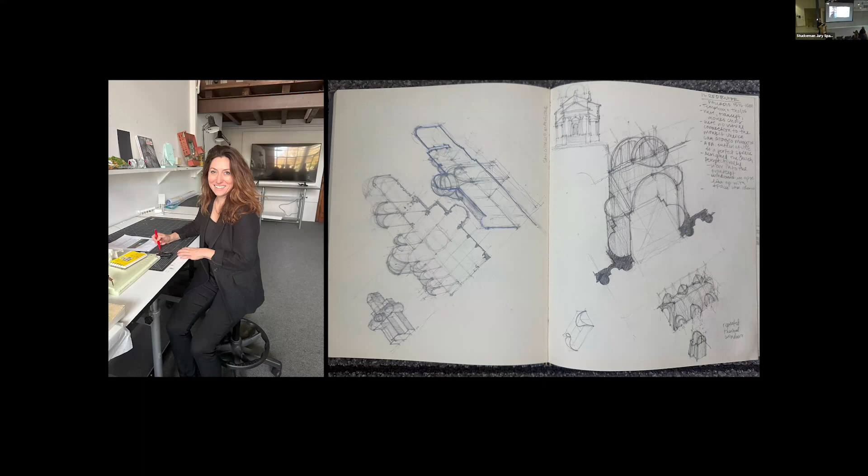And our practice, and it's influenced how we work. That's me—Jamie hasn't seen this photo—but I was back at my studio desk for a board meeting last November, so that's where we were in Florence, and some of the sketches. In school, traveling, being immersed in another culture had a significant impact on my education.

After I graduated from Syracuse, I worked for Will Bruder in Phoenix, who now is practicing in Portland. But Will has had a significant influence—he's been a great mentor, super passionate about architecture. He still comes to our reviews.

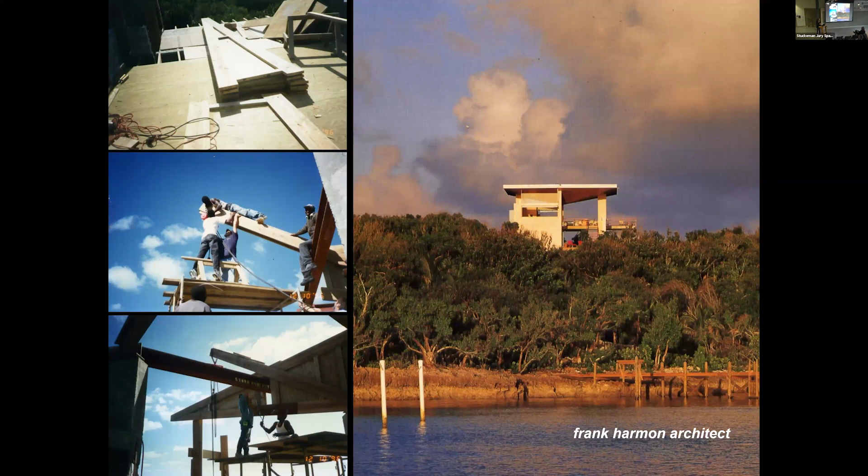We travel and see architecture, and just really understand—being on site, understanding materials, and putting them together in inventive ways. Vinny worked for an architect named Frank Harmon, who's also based in Raleigh, North Carolina, for 10 years. He allowed him to fall into these opportunities of making projects happen by building components that would normally be bid out.

This project is in the Bahamas, and the contractor quit, and Vinny flew down and did more than CA. He worked directly with the framers there, and they looked at him like, you have to know what's going on—even though usually, as the architect, you're not telling the contractors what to do.

I don't know—sorry, guys. Is that better? Good now, okay.

And so he had to really figure out how to make this upside-down inverted truss before he spent a lot of time in the Bahamas.

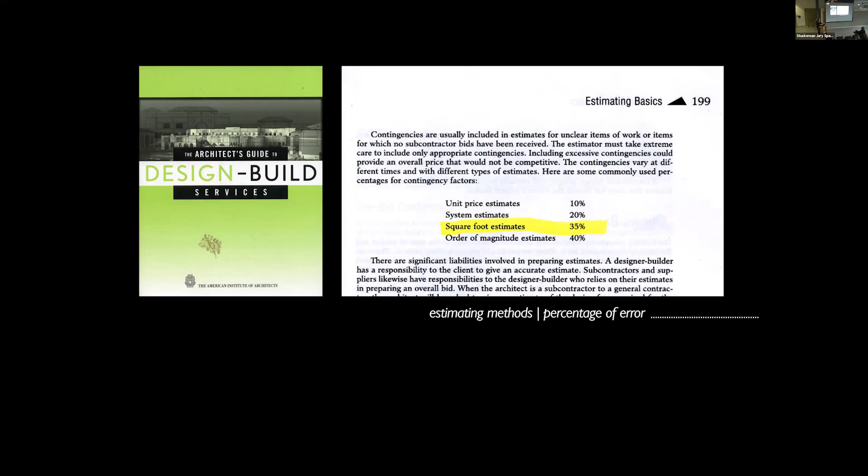So he went to an AIA conference and got this book about design-build. This was kind of a significant moment—you're always basing your cost per square foot, your project's cost, on cost per square foot, and really that's often 35% off. So we're responsible for being the architect and telling you how much it's supposed to cost in a relative way off the drawings, and it's really not that accurate. Unit price estimates are the way to be most accurate, so you need to be connected to a contractor—that's a line item budget versus an overall cost per square foot. So that was another influence.

Brunelleschi was really the last master builder. When Alberti came into the picture, he was passionate about the architect and builder being separate, whereas Brunelleschi won the commission for the Duomo because he figured out not only the design of the building but also how it would be constructed, including the formwork. This is also true of practices like Frank Lloyd Wright, where architects in the office would go to the site and really experience construction as it happened.

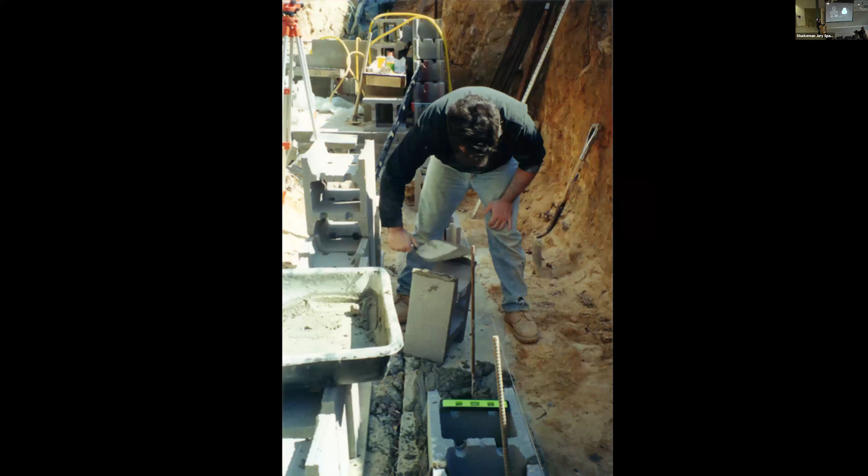We really value taking architects out to the site, and taking models and design to the site. This is our framer, Fernando, who framed many of our projects. We brought him the framing model, and that was enough for him to stretch the strings and figure out the project. So like in many practices, we go from an idea or a diagram, then jump to a model, which often gets messy because we're changing it.

From that, we could do probably a few less drawings because we're the ones building it, and we won't change order ourselves. Really we would build a mock-up, go directly to the roofer and say, let's confirm the conditions of the siding and all the window details. The last image is a standard standing seam metal roof, that roofing material with three different widths just put together in a different way.

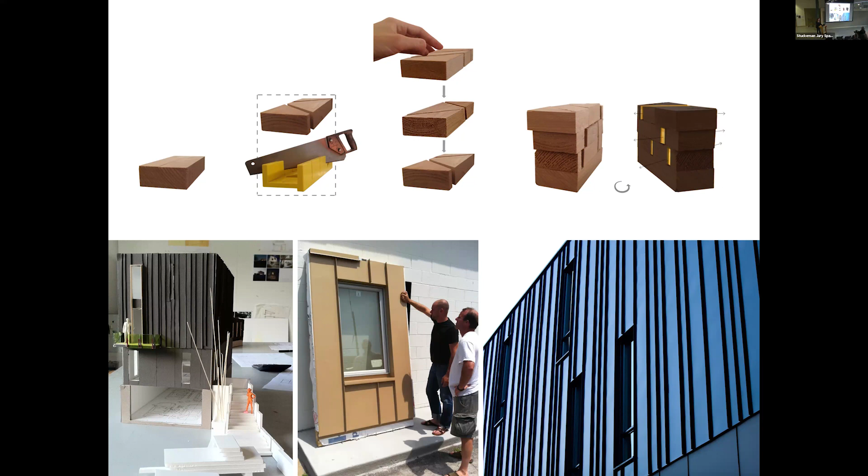That's Michael's house. He's a musician, and it's a 4-story house in the middle of Pittsboro, North Carolina.

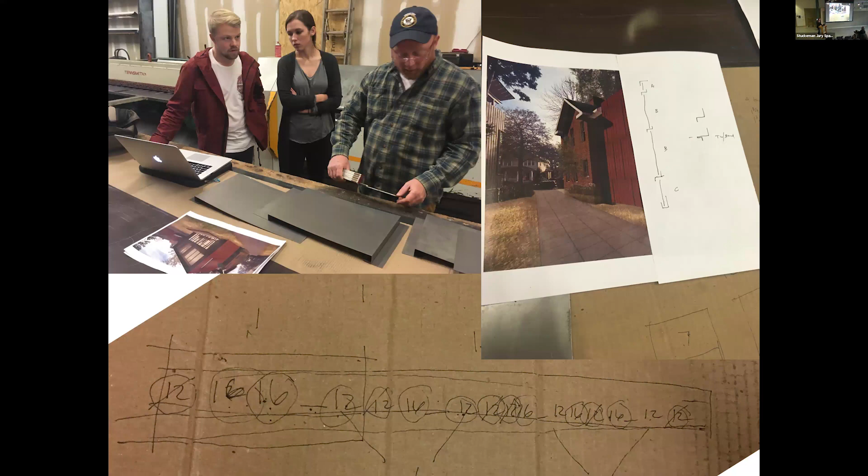This is Ron, our roofer. Nick and Morgan worked in our office a few summers ago. We always have students spend time in the summer in our office, and what we like to do is really get them connected and be on the site talking to those making. I think we learned so much from our subcontractors—insights you just can't get from doing the drawing.

So we were trying—he's done a lot of our projects. This is Cor-Ten, and they worked directly with him to come up with this kind of custom siding. It's not actually such an expensive material, but then you think about how you could put it together in a different way with these reveals and the lengths and widths of the material. Ron also helped us with this house, also Cor-Ten, similar material, different project and client. He's just a small operation, a couple people in his office, a local subcontractor who's done some really creative things.

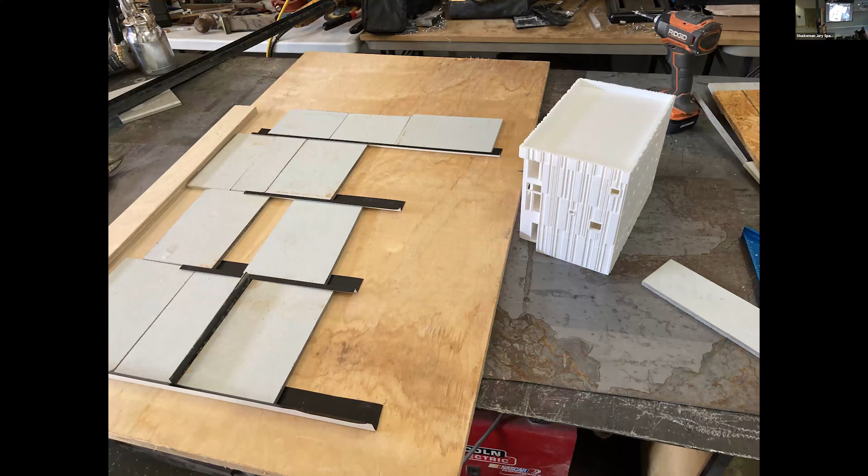This is in our shop. I'll show you a series here. We were building a house for clients in the middle of COVID, and they had a bank loan, which means there was no more money than what they had.

So we had 3D printed this model of a custom metal siding. We realized that it would be too expensive for what we had in the budget—there were some things that got more expensive during COVID.

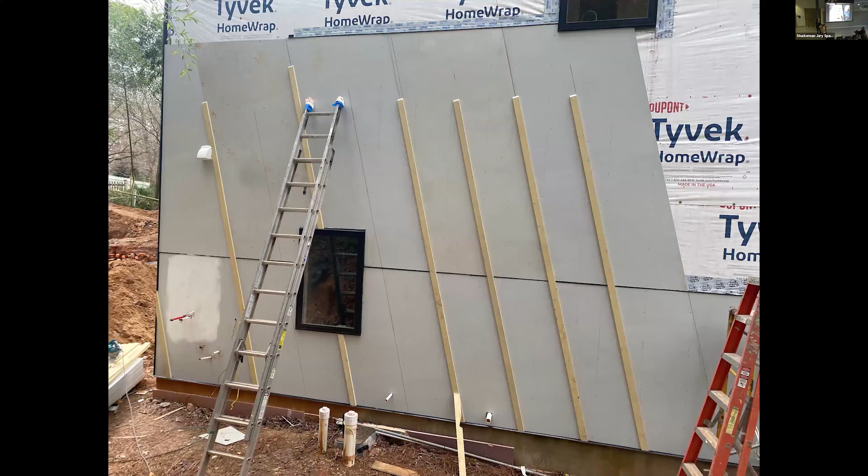So we decided to use a cement board siding and look at it in a different way. We took the model and put tape on it and thought about it in a really messy way, but figured out what we could do. Luckily our clients were really engaged in this process and open to different ideas. So we thought about a traditional board and batten with fiber cement board siding, and how we could reinterpret that in a different way.

So that's Paul and Judy, our clients, and they love color. She's a chef, they own a restaurant, and they're musicians, and they just wanted something really fun. And so that's what we did.

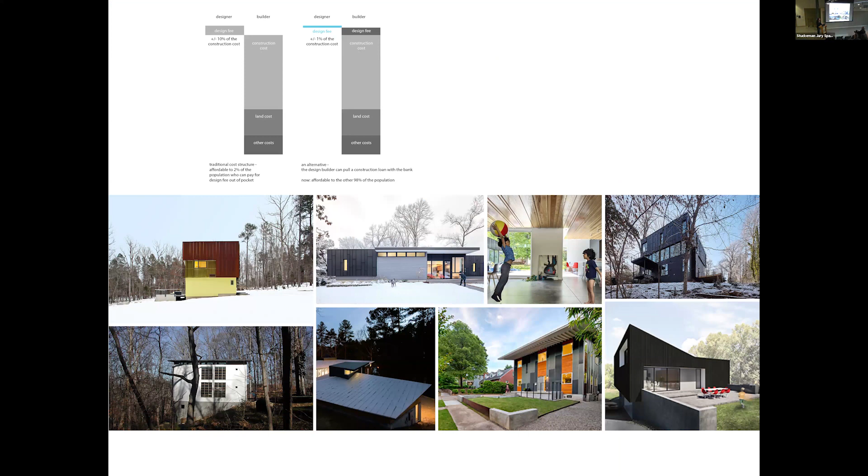We had to make those choices and be inventive with them, given the budget and time of construction. So in our practice, many of our projects have been what we call bank loan architecture.

Our clients are really great, they're passionate about doing something different and not just buying a standard house, but they don't necessarily have the resources to put a down payment on a piece of property and then pay the architect's fees. So what we could do as the general contractors is have them pay a small percentage of the design fee, and then roll the rest of the design fees into the construction loan, because we were the ones getting the construction loan. We really felt like that was making architecture more accessible to a larger group in our place, and it allowed us to expand our reach and have more projects because we could do both architecture and construction.

So this is an example of one of those houses, this is for John and Stacy. John Cravel said, as time goes forward, we're catching up to the past in a way. We saw these agricultural structures in the landscape of Hillsborough that were rusted and had a more negative connotation, like they were falling apart. And we saw that as something really beautiful - how could we reinterpret that?

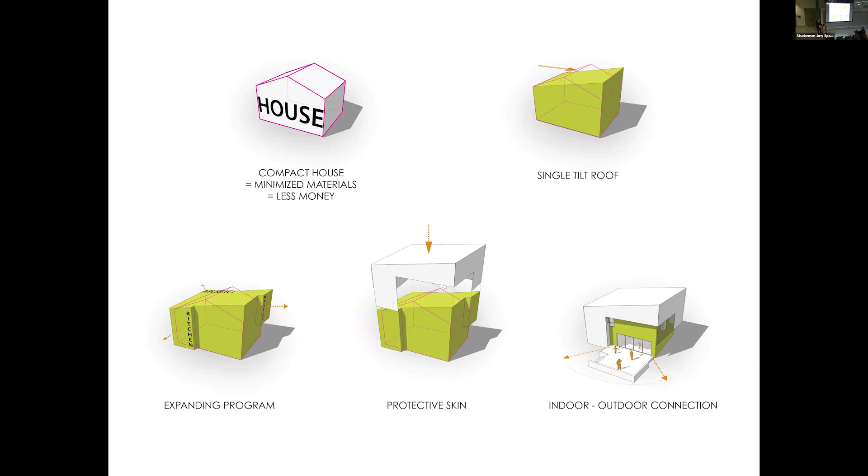We also knew that with a $300,000 budget, we needed to think like a traditional spec home builder. So this image of a house, and how we could make minor adjustments that wouldn't add a lot of cost - we could maybe tilt the roof in a single tilt, we could expand the program on the inside with small cantilevers, not in steel but in wood, like a bay window or fireplace, and just really think about how we could use the material to create a different form.

So we worked directly with the concrete subcontractor. If we had given them the plan - there are no right angles - they probably would have charged us twice as much because it's different and they'd have to think about it differently. But we just worked with them on site and said, it's still the same formwork, the same material, the same amount of time, there's just a few different angles. That was a way of maintaining costs, working directly with them.

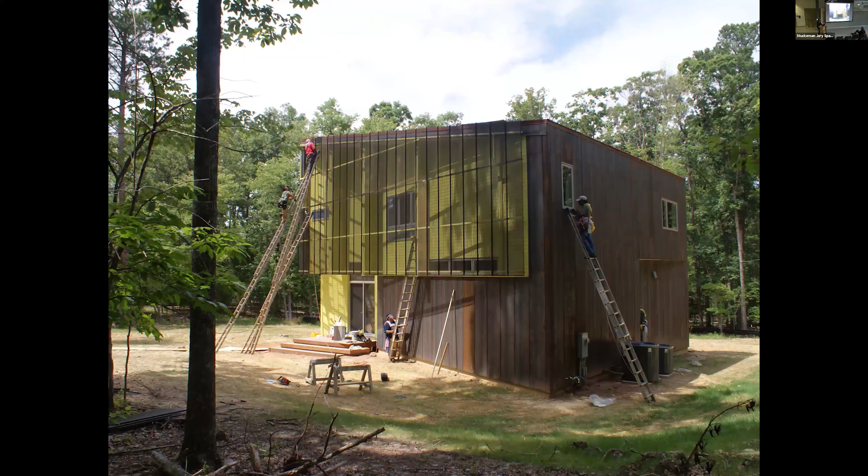And then from there we extruded the framing, and we had Ron with us again. We used Corten with flat panel and then perforated Corten - these small fins on the front where we could cantilever out and create depth and shadow, a screen that made it different just using more cost-effective material.

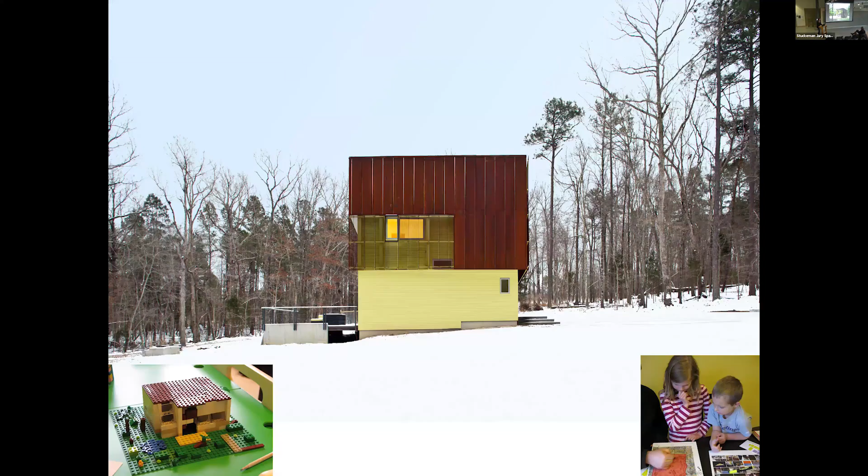That's Ian and Madison, their Lego model when we first started the project. But we see the whole family as our client. And that's one of the infrequent days we get snow in our area.

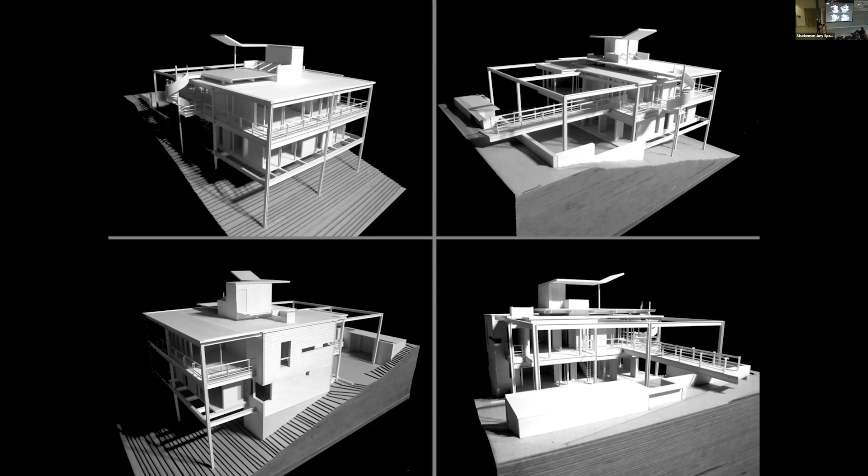The clients at first said, there's no way I'm buying that house. But then they went and visited all of the case study houses in California, and they came back and said, you know what, let's do this project. So now it's a house for John and Molly, and they collect art. This wing on the roof probably would have been cut if another contractor had built it, but at the time our firm took on that piece, and it's really a great place where they use it every day to have meals outside.

Another way of working is we presented this model to our clients, and they really got it. We had shown them more realistic renderings of different iterations, and they didn't like those, but for some reason they really got this one, and they said that's the project.

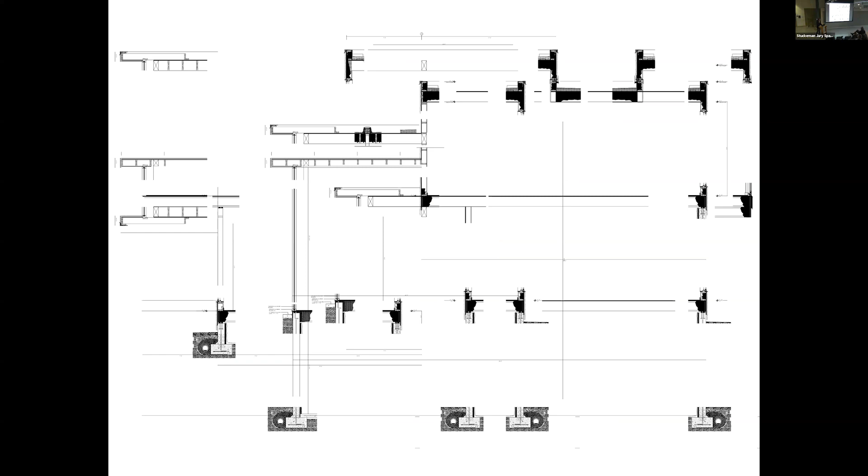But from that, early on, we like to jump into detailed drawings to understand how we're going to make all of these white frames and maintain the proportions. So working backwards, very early on we go into how will this be made, how will we construct this, confirming all of the details before, and then we use that to influence the design.

And so building models, this is the project. It's a house in Raleigh. We were just the architect for this project, and another contractor built it, but we tried to maintain the diagrammatic idea of that first model through understanding how something is made and constructed.

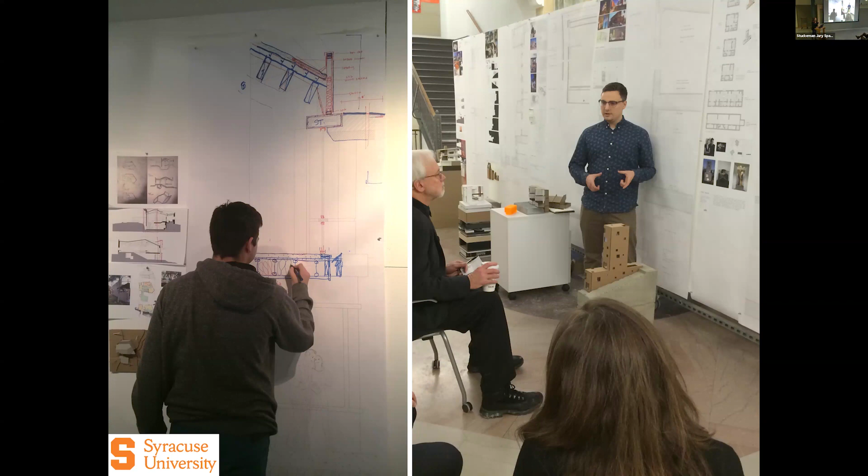As Jamie said, we teach. This is from Syracuse, and we like to do these big drawings and models and different studies, kind of how we work in our own practice. And this is from the studio at NC State.

Right before COVID, we brought scaffolding into the studio. It was awesome, we were making all sorts of panels and mock-ups, and then it went to Zoom. But this is a digital fabrication studio, so exploring how things are made.

We torture our children - that's Elizabeth and Marissa with architecture. We make them drive around and see a lot of buildings. I think that's really important as an architect for all of you.

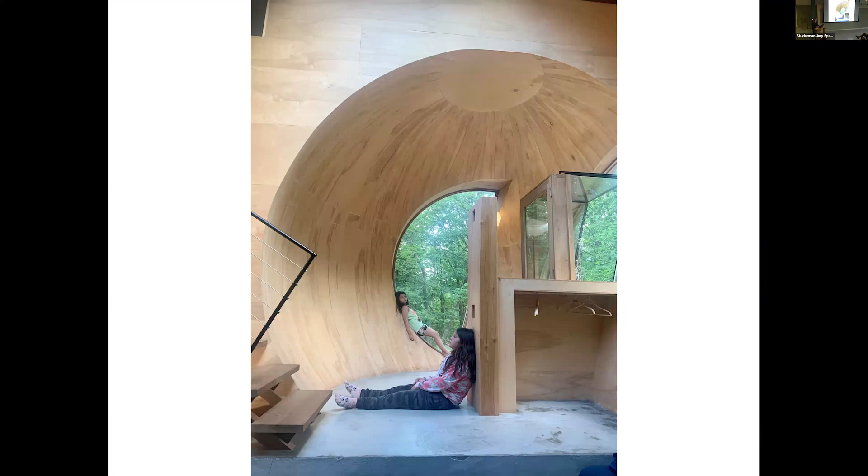You'll see their masks during COVID - we drove to Kentucky, and just really being able to understand materials and light and experiencing architecture is so important to us. This is Steven Holl's cabin, you can rent it on Airbnb. It's pretty awesome, our kids loved it.

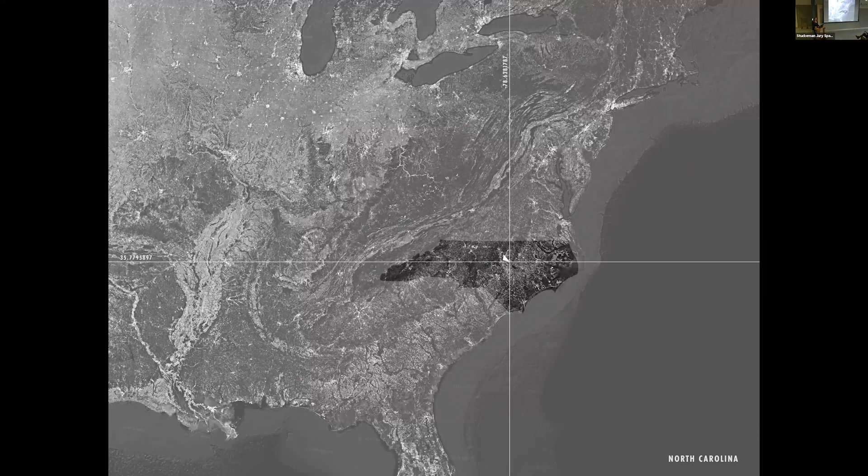So we are based in Raleigh, North Carolina, and we're in this really great area called the Triangle - Raleigh, Durham, Chapel Hill. A lot of universities, a lot of research.

It's not a huge population - it's growing quickly, but between the three it's a little over 1 million, and that number has probably even changed by now. But you're probably familiar with many of the universities, a lot of great art and culture. Many of you know us for this, especially this time of year, and so that's where we are.

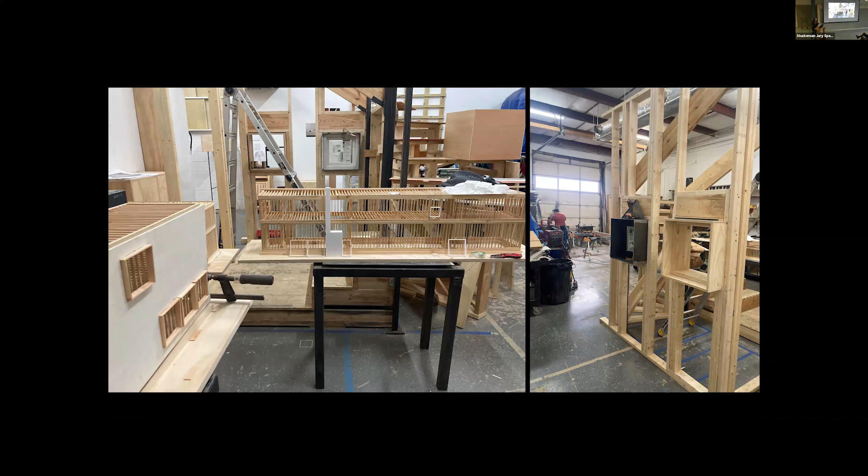So all of these realms have an influence on how we practice. And this was from the other day - we're building this big framing model of a house that we've been working on for a while, a multi-generational house.

The other image is confirming the window details and how to address having a good thermal break. So we're just doing some mock-ups, but we'll randomly do things like that throughout the office.

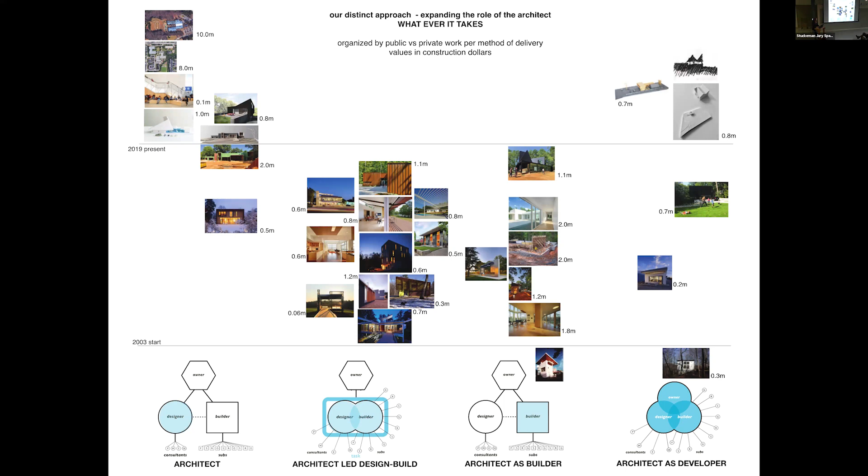And then we've developed a few of our own projects. So you can see a lot of houses between 2003 and 2019, and we were trying to make the number of images above 2019 grow, and that's really why we transitioned the practice and renamed it, because we wanted to start doing more public work.

So again, these are the different models of practice. We're kind of messy - we don't just think there's one approach. For us in our place, we've had to expand and do different things to survive.

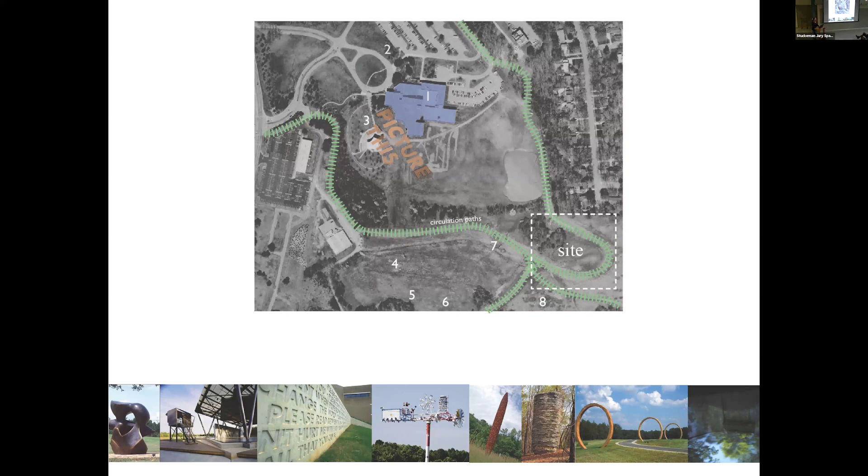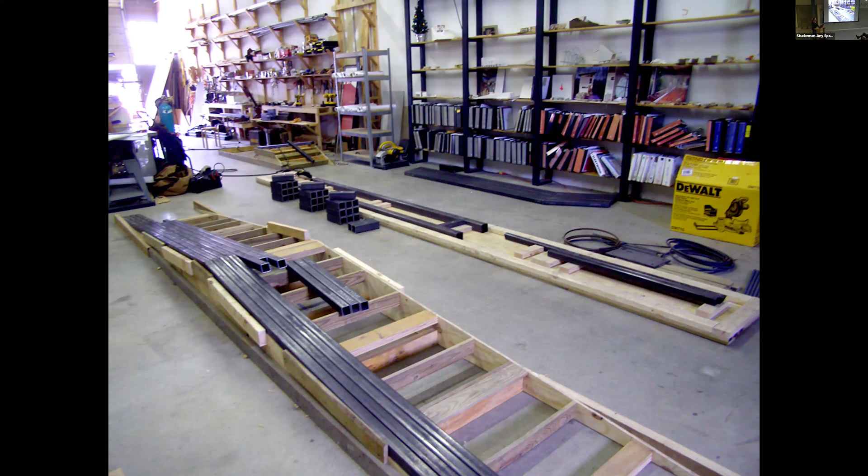This is another early project of the office, at the North Carolina Museum of Art. This one is design-build, architect and contractor together. It was an outdoor classroom in the art park—we have a great art museum locally, but also a great outdoor sculpture park. This was built in our old shop, where we made the components like Tinker Toys, then brought them out and assembled them.

This is a pavilion for an outdoor classroom, but it has taken on a life of its own—people have gotten married here, they do yoga here, there are class trips. I think that's really an amazing thing, that the first intended use is not always the use of the project, and that's what has really inspired us.

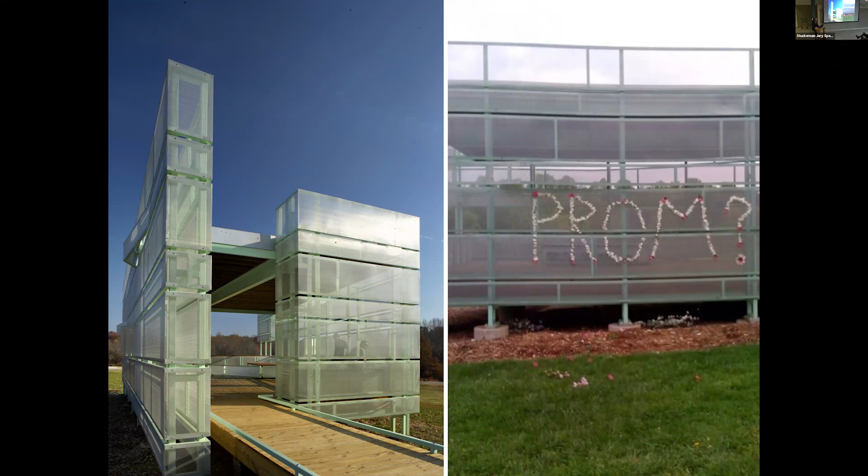That's our daughter's class, many years ago, on a field trip. Someone in our office one summer brought in this picture—her friend asked, 'that's not Vinny asking me to prom,' someone from our local high school. I think this is a really pivotal moment where you see how the community responds to your architecture and does things you wouldn't think about, like putting flowers in the perforated metal.

That's really the foundation for what inspired us to continue doing more public work. So this is Larry and Angie from Brooks Scarpa. They had a client—one of their first projects in Los Angeles—who bought some land in Hillsborough and decided to build a house. We were the local architect and contractor, and it was great working with them.

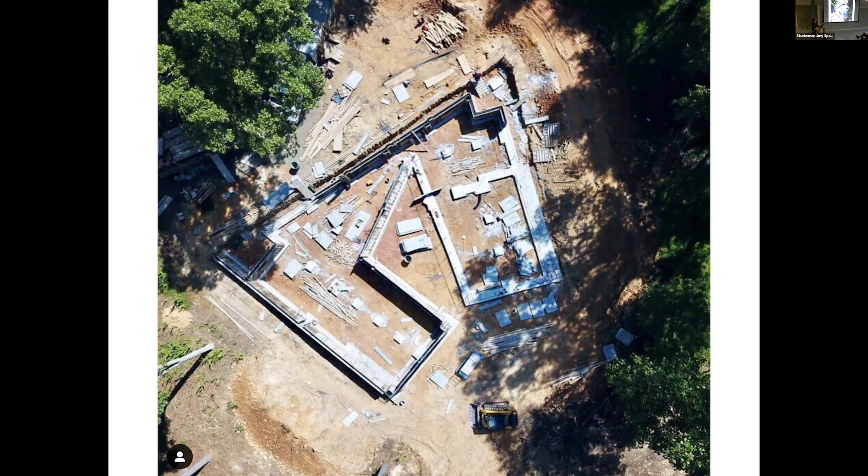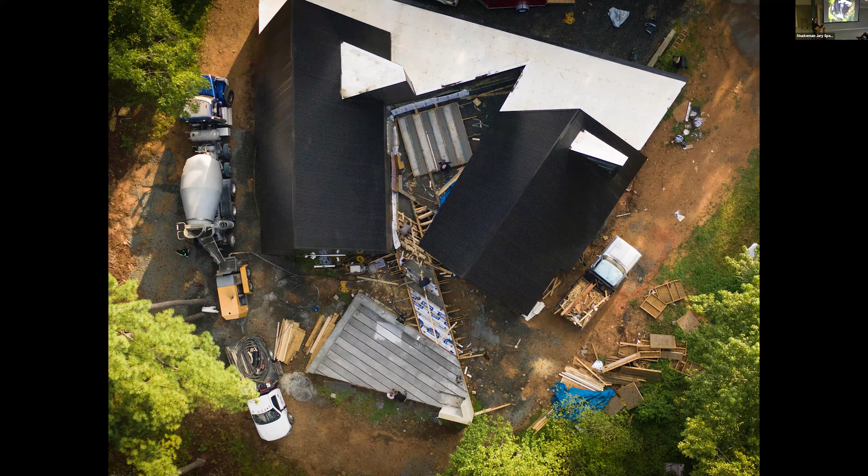It's kind of like having an opportunity to work in someone's studio and collaborate. Again we see concrete, no right angles, working with the same subcontractors we always do—but this is a really different house. I think we really believed in helping Larry and Angie realize their vision, and in that case we understood why they would make things differently or want to change things. We're all there trying to realize the best design possible.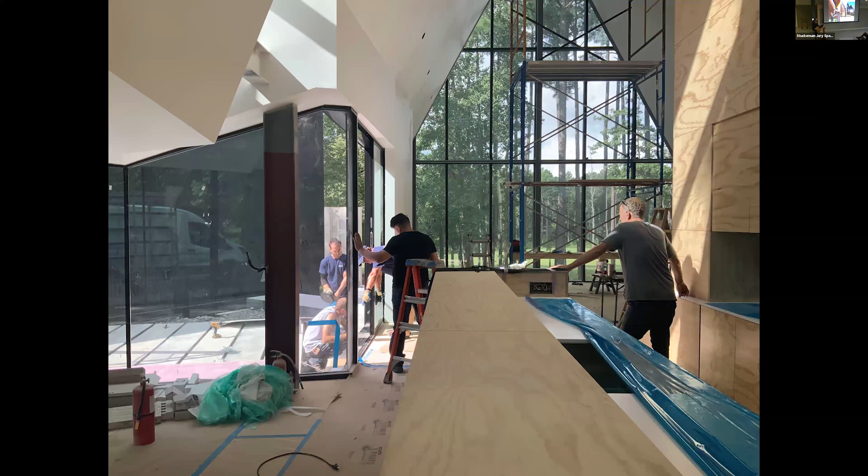So this is how we would communicate—Larry's on the West Coast, and that's our client, Steve. Do you want your spring point to be at B or A? We would confirm things and stretch strings, really just wanting to get it exactly how they wanted. It's this one-story house with 30-foot tall peaks on a large parcel in Hillsborough. They're still in the process of getting final photographs, but that was a great project to be part of.

I think why we show this is that most of our business doesn't come from development, but as an architect it helps to understand the systems at play, because there are a lot of people using Zillow who aren't necessarily interested in architecture, or that's not their main goal. But if you understand what the systems are and how to use them, that's how you begin to have an influence.

So we bought a piece of property—that's what our clients bought it from us for—in a neighborhood where we have about 5 other projects. There's really steep topography, so we understood it was a leftover lot. We did a quick sketch, put it on Zillow, and got a client. They bought the land and hired us for design and construction. I think that was kind of an interesting process.

Then this is really the main transition—it's taken about 7 years to really move into more public work. There were a lot of RFQs we sent out, but they said no. I say that because once you start in a particular project type, it's sometimes hard to really change; you have to keep being passionate about it and trying to change the perception. Often that means starting with really small projects. After telling us no, 2 years later, we submitted again.

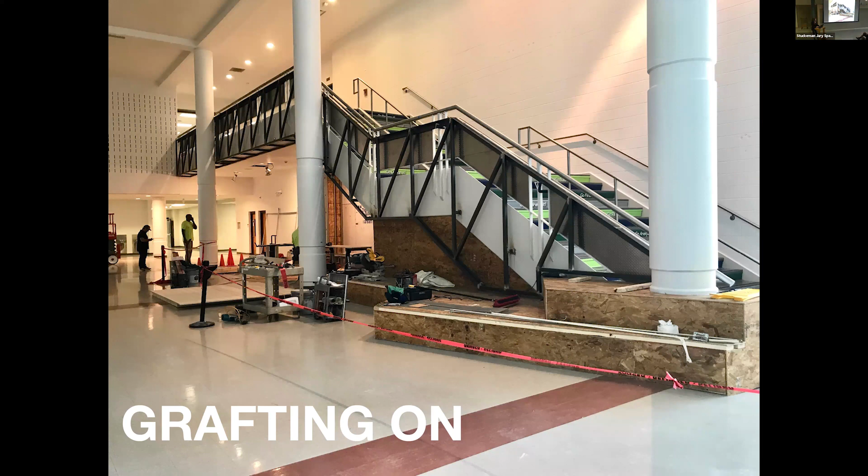So this was the existing space. I noticed that students don't have anywhere to sit. It's pretty dark. It's a large high school in Raleigh, Southeast Raleigh. What we realized is that with our budget, thinking as if we were going to build it, we would have to use what's there. So painting the space white was probably one of the bigger impacts and worked pretty well. But then this stair was overstructured, so we figured we could just graft on with an off-the-shelf material, steel, and use that. We wouldn't have to add any more structure, and we created pretty cost-effective plywood benches.

And then we turned the stair into a light fixture because that's what the space was really lacking.

There were a lot of trophy cases, and the principal at the time, the school's exceptional at sports, but she said, I'm proud of our history of athletic achievement, but I want the students to be on display, and I want to create a space that feels collegiate and encourages them to go on to the next step after high school. So within the depth of the trophy cases, we didn't add any new structure. We knew we couldn't. We just made a place to sit.

And so those are their writing surface tables. Now they have art, and it's really nice to be in a space that's larger, but you can have a smaller conversation, so you can be a part of the bigger community but still private.

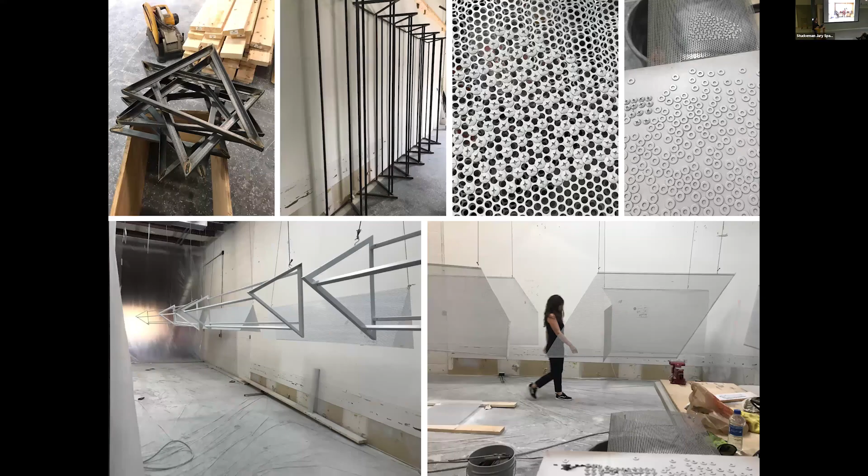The light fixtures in the space didn't come out so well the first time the contractor made them, so we told him we would take these on. This is our shop before we had renovated, and we fabricated those for him.

But really with $150,000, we worked to transform this space and gave 1,600 students a place to sit. And this is used for magnet fairs and a lot of other events.

I think that's our girls. What's really nice about this is when you do work in your community, they came back to the school for a basketball camp. They play a lot of basketball, but with a small $150,000 project, it received national recognition. I think it just really shows that with a small budget and small scale, you can still have a big impact.

So this is with the same client, and because we worked really hard on that first project, they gave us a study for a $10 million project.

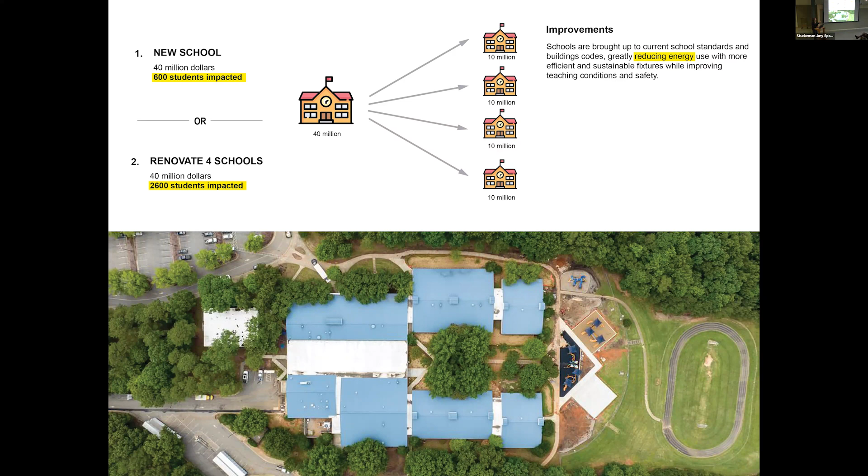So they gave us a study, and in our county school system, they were trying to figure out how to save existing buildings instead of tearing them down. We have $40 million to build a new school; in our community a new school costs around $40 to $50 million. So we said that if you distribute those funds between 4 schools, you can have an impact on 4 times as many students and renovate schools versus tearing down and building just one new one. That was kind of the principle of the project, testing out this new idea.

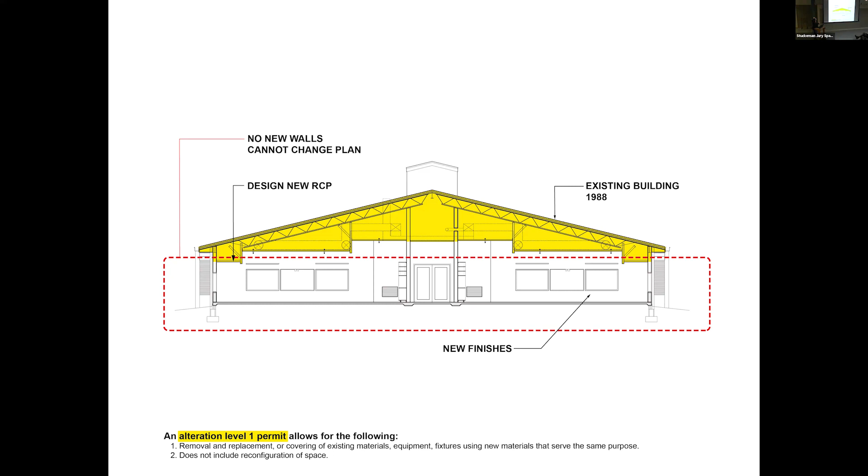Throughout the building, not in this section, the hallways are sloped to a non-ADA slope, which we couldn't change. So we were limited to what's called an alteration level 1 permit, which meant we couldn't change any of the interior walls. We could just basically do 1-for-1 replacement of fixtures and finishes, and then our real design opportunity was the reflected ceiling plan.

The original architect, I think, was very thoughtful about natural light, so there are these moments of clerestory lighting throughout the building, but we really wanted to unify that as one element.

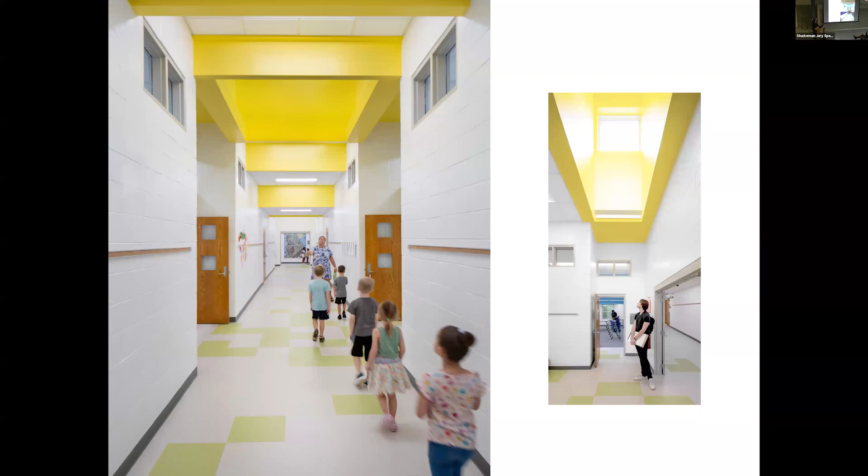We introduced one color and cleaned up all of the spaces, renovating the classrooms while really acknowledging the natural light in the space. This is the existing classroom, and we introduced color in a different way, opening it up and enhancing the natural light.

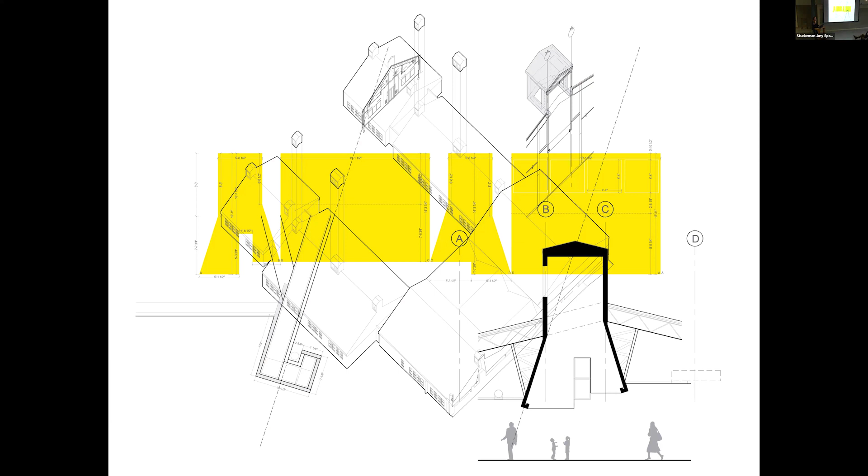The county school system has their standard materials, but we looked at how we could use them, and how the project would be made. Going back and doing diagrams and drawings like this is really important to us, but really all we had were metal studs and sheetrock to make a difference. So that was our palette.

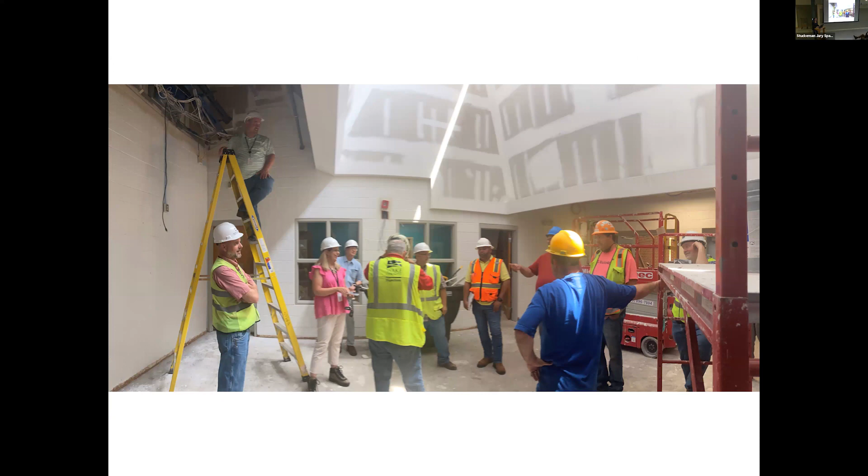I moved to North Carolina 17 years ago to work for a nonprofit called Design Corps, a 1-year AmeriCorps fellowship. We focused on working with the farm worker population, one of the largest in the country, here in North Carolina.

We used that money to hold a series of participatory workshops with farm workers, at a farm in Brevard. They were pretty progressive, probably better to their farm workers than most, and made sure they had a good place to live. That was our client, really, in the western part of our state, a farm that grows mostly herbs.

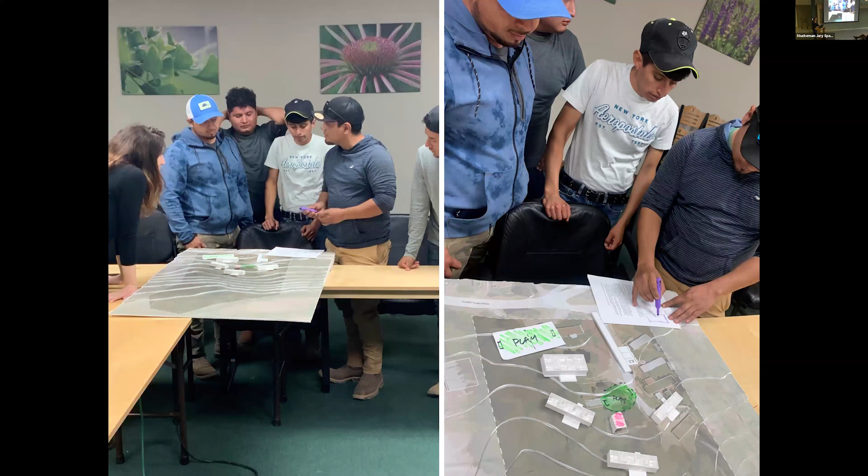We held a series of workshops. The owners of the company left, so it was just us, the farm workers, and the nonprofit, who spoke Spanish and helped with translation. We presented our ideas. Interestingly, most of them live in mobile homes now, 2 and 3 bedrooms, which are kind of falling apart, as normally happens.

We showed them a plan for a 2-bedroom unit with a bathroom, nice and clean, and we were really excited about it. But you can see in these drawings, they really didn't like it. It wasn't a good idea to them, because sharing a room with two or more people meant they never had their own personal space.

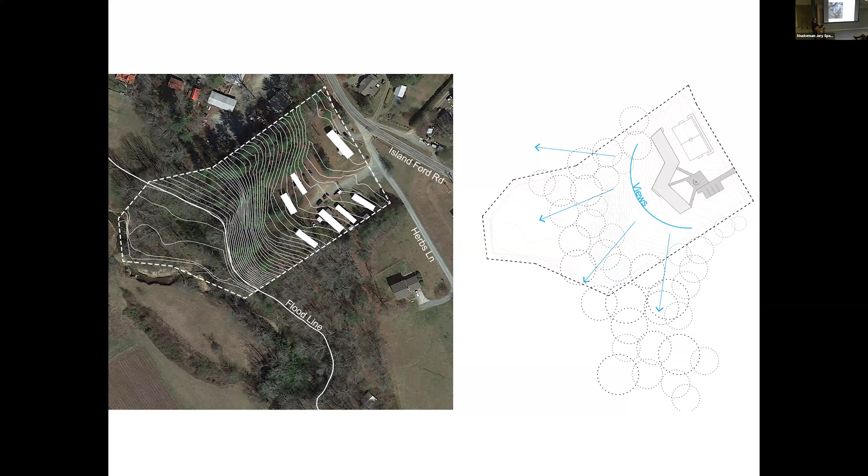What really resonated was going back to individual units, almost like an individual room, with a window and a door you could close for privacy. Even if it was half or a third the size of their current bedroom, that would be much better.

So we took that feedback and decided, for 30 workers, how can we rethink this? Even though we didn't want to hear that they didn't like our design, it was actually the best feedback. We really believe in having those conversations with our clients and engaging the end user.

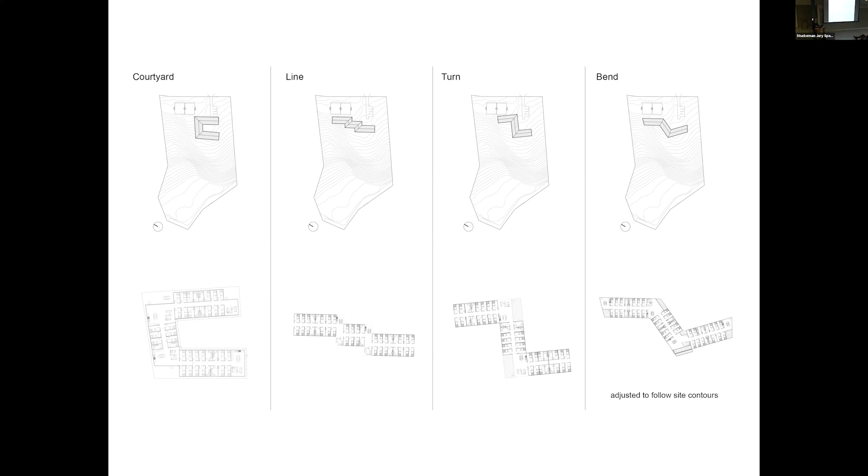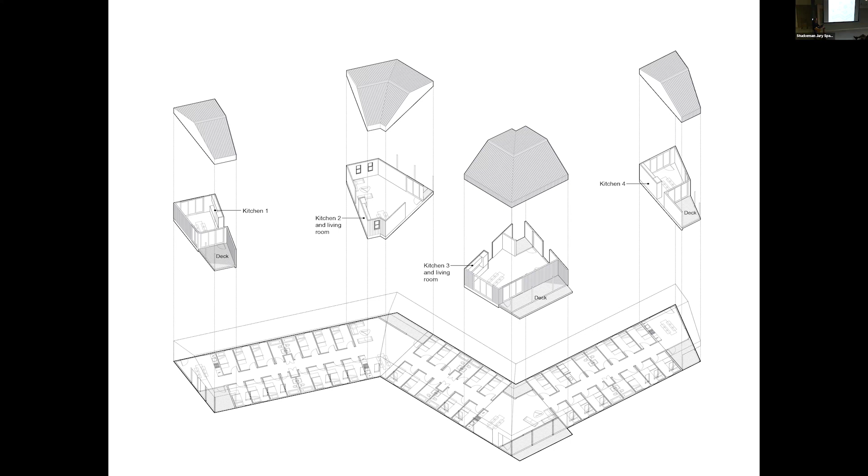And because of the grant, we were able to have those—the farm worker community doesn't always have access to an architect directly. So we're trying to think of ways of coming up with a shared public space and individual units, providing more bathrooms than required by standards, and having areas where you could be part of a larger group or retreat to your own space.

And then we've been processing how we can make it in a factory and deliver it to the site. That's been interesting, because a lot of the manufactured housing companies can only go a certain distance, or they don't want to change their design because it's already been permitted and meets code. So it's been an interesting series of discussions.

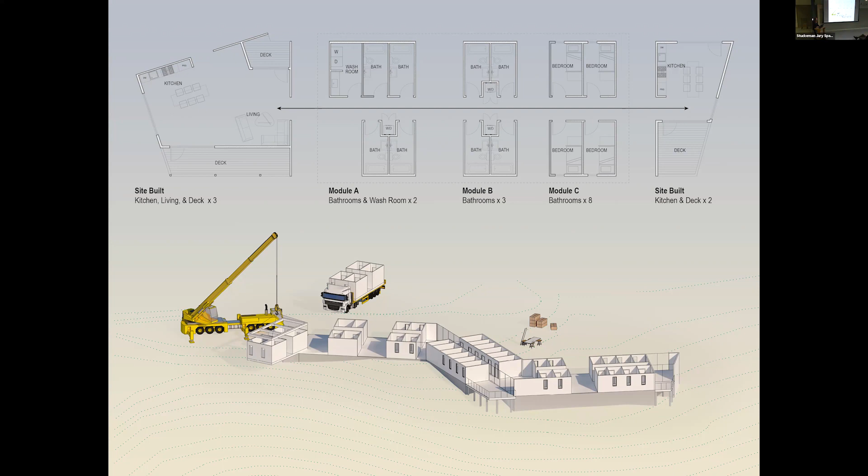The nonprofit secured additional funding from a local foundation that is covering the soft costs of the project. So we're kind of trying to figure out how to make this work, and it has to be focused on farms in Western North Carolina. The original farm decided not to do this project.

I think that was Melinda, who works at the nonprofit. She said she's been working on farm worker housing for 30 years, and she said, you asked me at the beginning why this doesn't happen, and here we are at the end, and you're not moving forward, and it's because they prioritize other things on the farm besides housing.

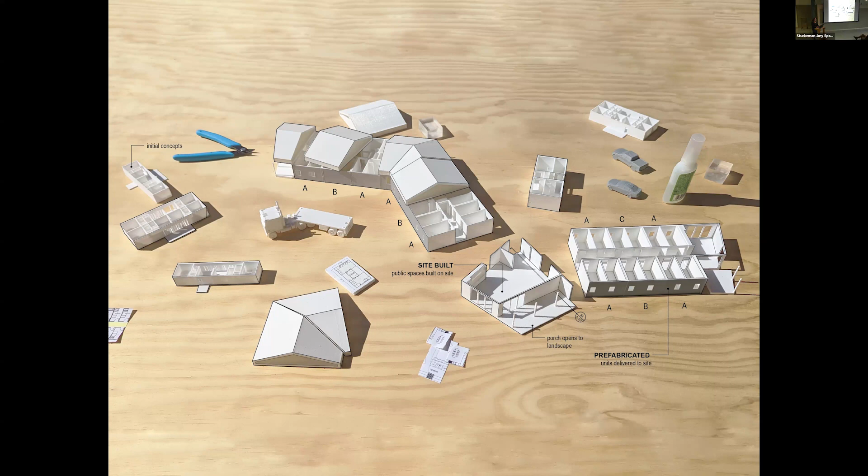But we're developing a unit for 6 workers, which will probably be more tailored to a lot of the farms in the area. So we'll take what we've learned from this, and we're working on adapting that unit—using more durable materials on the outside, but really maintaining that connection to the site.

But for us, this was a really exciting project, because this is the first freestanding pre-K center—public pre-K. Usually schools have 2 classrooms within elementary schools, but this was an independent center, on an occupied campus of an elementary school.

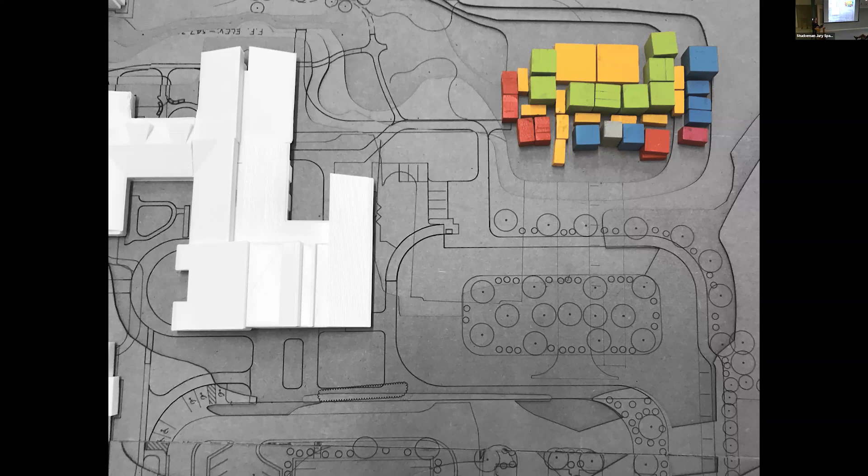So we had to think about how to get a new building on this campus. And I think beyond the architecture, this building addresses food security, emotional support, speech therapy, academic support. There's a fair amount of Title I students in this building, and it's all public education.

And so I think architecture can address a lot more than just the building. But this is early on in the process—we met with all of the pre-K teachers and staff, and they had some of the best insights.

This was very early on, because this was a project type that the county school system had not done, we had not done, they had not done, and so we were all really learning together.

In addition, we removed some contaminated buildings, so we didn't add new impervious surface, which helped us from a permitting standpoint. But what was great is that we added this new pre-K building and then gave a walking track, a constructed wetland—which we needed for construction—and more playgrounds to the existing school.

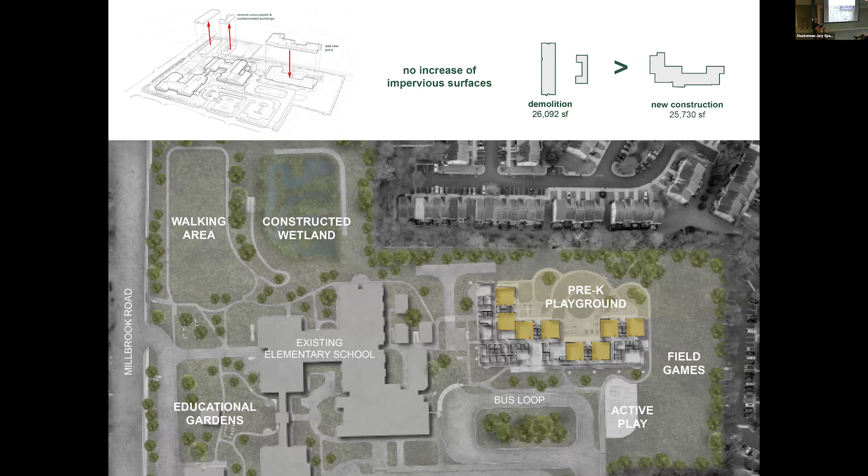So with the building, we enhanced the overall campus, and it's an environmental connections magnet school, so they can use the wetland for learning opportunities. I think this will play.

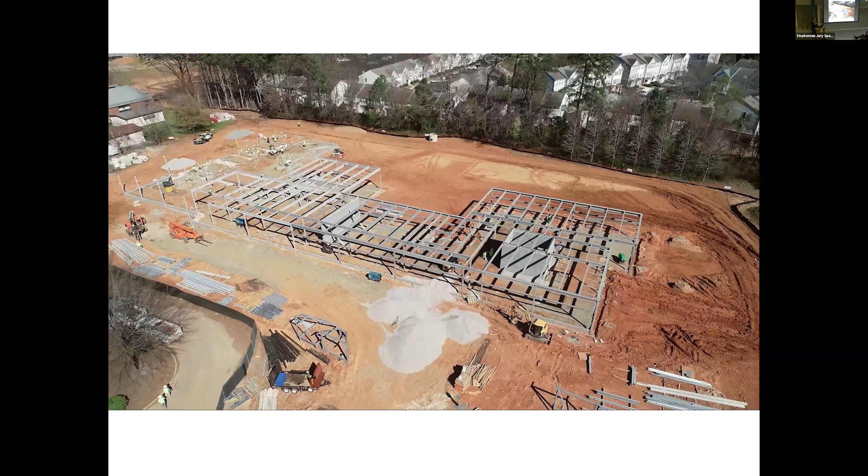The building's built, but I just show this because for us, this was our largest freestanding building project as a practice, and it's going kind of slow. But trying to figure out how to have construction happen on an occupied campus while the other students are still there, how to phase it with the wetland and other components of the site—these were all things we learned through doing construction, because we imagined how we would build this and really tried to make that clear and easy for our client.

And so this is really 8 classrooms surrounding a garden, and everyone has played with these manipulative blocks, but the idea of making each classroom unique comes from having access to natural light and really activating the ceiling.

And it was great because the standards of pre-K are related to daycare, and we had to provide direct access to the outside, so we couldn't have a double loaded corridor, and that really allowed all of the classrooms to be around a garden.

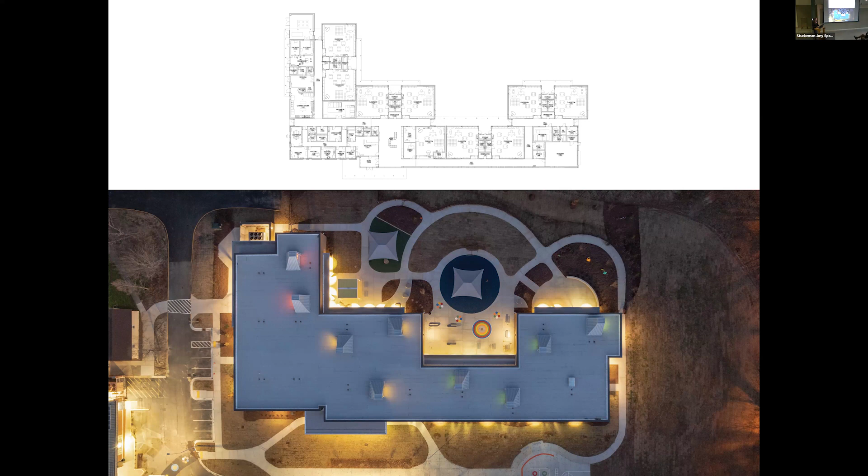You can see that each kind of monitor has different colors throughout the school. There's 8 classrooms in pods with bathrooms and recreation rooms, and one room when you come into the building that allows the teachers to understand the students before they get there, kind of in the middle near the big lobby. That was a really key component of this project.

Using the brick and metal of the existing buildings on campus, but thinking about it in a different way, and then adding color. They're the caterpillars. So this is a cement board siding that was painted, and as they go from caterpillars to butterflies, the colors change on the building.

I think these light monitors, clerestory windows, were really important because it's kind of the pre-K version of a learning commons. When you come in and feel comfortable as you first enter, there's still the recognition of this element that is repeated throughout the classrooms a lot of times.

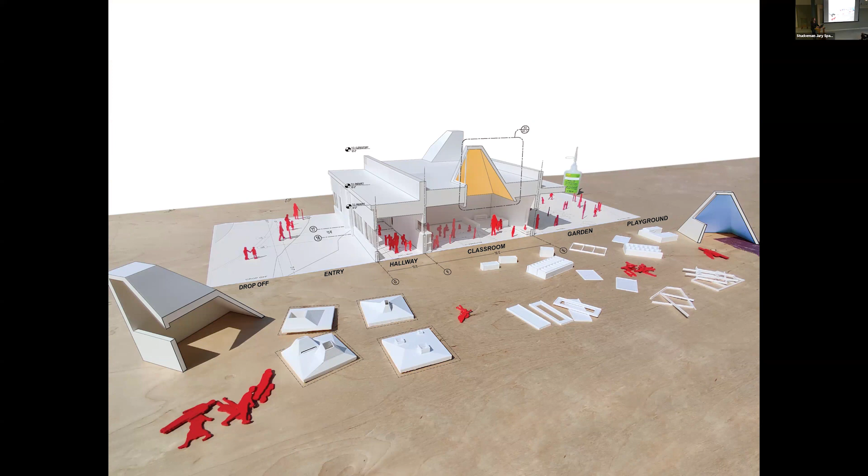And really thinking about the section of the project, these were so important to us in making the spaces unique, and we really wanted to do this for the teachers and the students. But there were probably 3 or 4 occasions where the planners or maintenance and operations said, there's no way we're doing these — they're gonna cause problems, they're gonna leak.

Well, it's not a skylight, it's a clerestory, so it's just going to be detailed like a window — it will be fine. Then they tried to get rid of them again, and we looked at how much we'd built a mock-up and how much they would cost. It was probably $200,000 over a $15 million project, so it's not really that much money — you shouldn't get rid of these.

And then they were trying again, and we met with the teachers and told them they're trying to get rid of these. So the teachers did their own research on the value of natural light in classrooms, and they were able to help us keep them in the project.

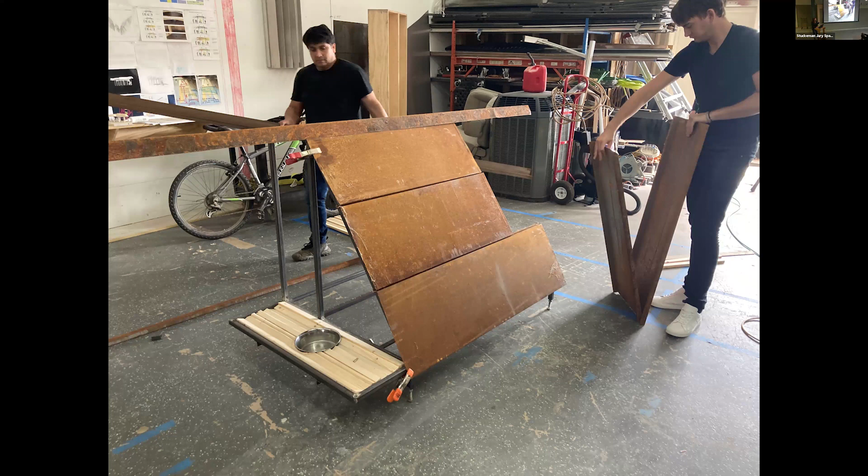And so we built this mock-up because we wanted to understand it in detail. And we have a local doghouse competition.

So we built — that's our dog Oscar. That's the only time he's ever been in here. He hates it.

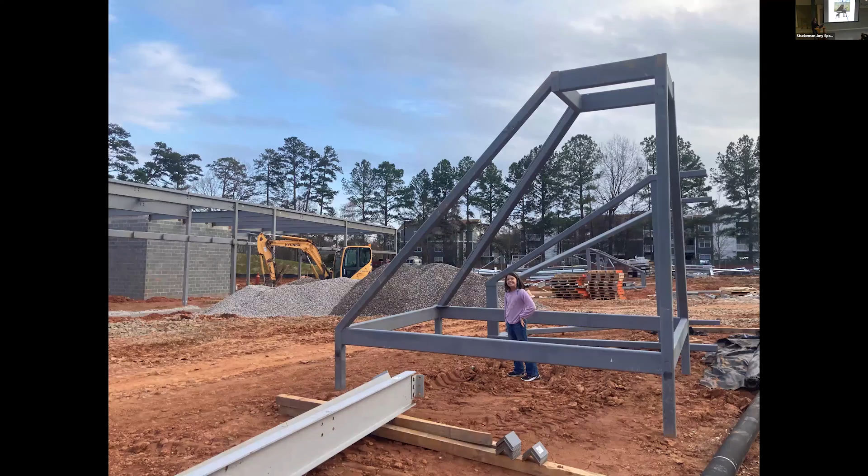Then Ava came along — that's Marissa standing in the full-size frame of these clerestory monitors that are on the building. From that scale, we really believed that they needed to happen.

So we were doing everything we could to keep them.

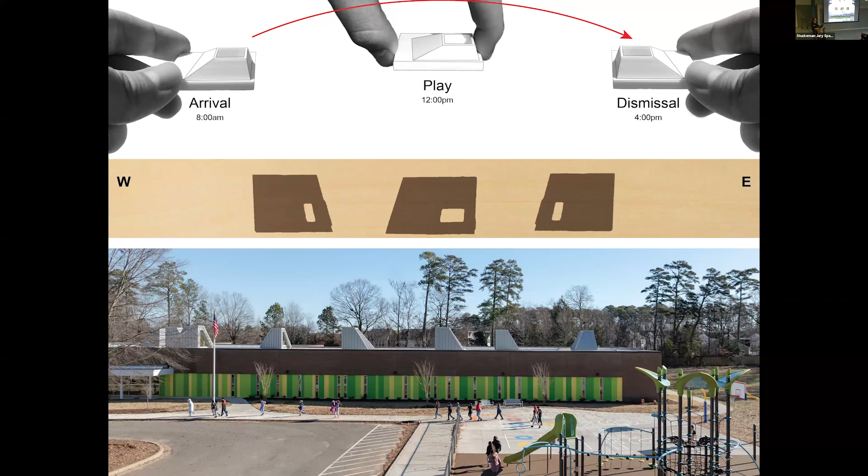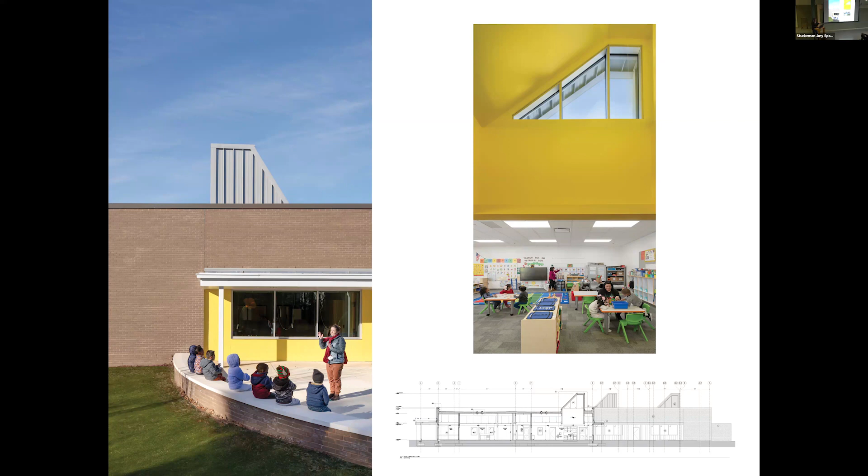And you recognize this on the outside of the building, these light monitors in the section within. That's when they become the butterflies on the back, more orange and yellows.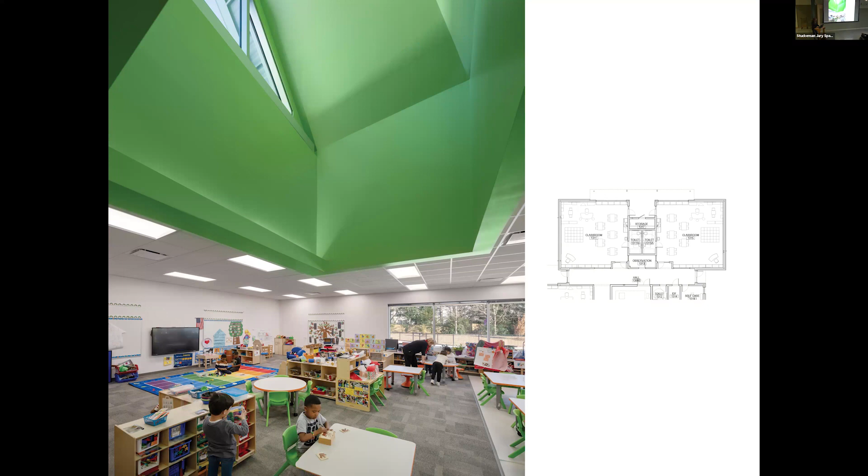They have a really large playground with tricycles and play equipment and lots of fun things. We photographed this recently — it just completed, so it's wintertime. There's a lot of landscape, but really just this connection between the classroom and seeing light from above and then seeing outside.

The walls get filled with teaching materials, so you can't really have that many more windows than what we had in the main area. So this was even more important to us, and there are different colors throughout the building.

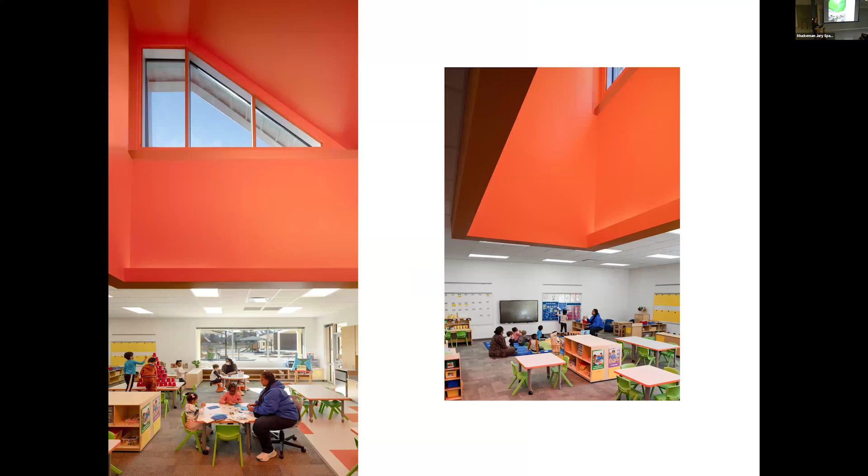So I think I'll play this video. I don't know if it will work, but this is at the ribbon cutting, and it's really special that these 4 and 5-year-olds have so much confidence because they have this building.